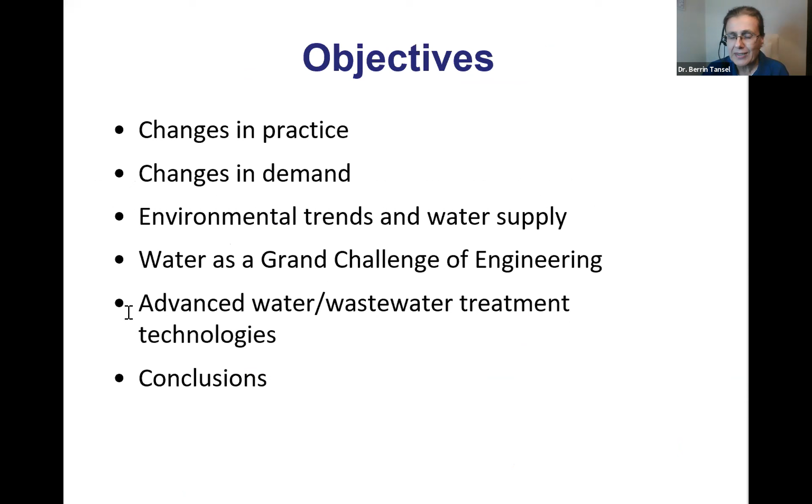First, driving forces for engineering practice include breakthroughs in technology, demographics, challenges, economic and societal forces. Currently, we are in the middle of a challenge, of course, the pandemic. So that is going to result in some new technology developments, as we are seeing in the vaccine, as well as some other effects in the technology.

Over time, historically, there have been 4 industrial revolutions that have changed how we live our lives and how we use technology. The first industrial revolution is mechanical, which created steam power and how it is used in different applications. The second industrial revolution is electrical for mass production. The third one is more recent, in 1969, the internet, which has changed our lives. And the last one, which started around 2000 or so, is the use of cyberspace, the digital revolution.

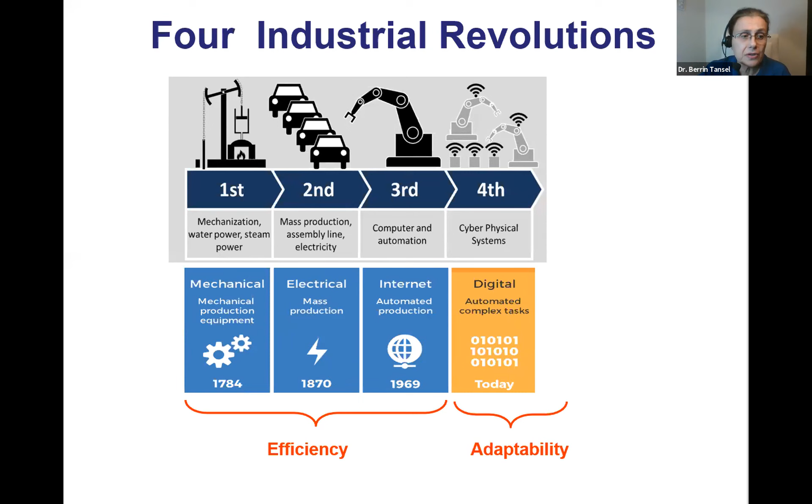So as the world population and technology are changing, the first 3 revolutions have changed corporations from an economic perspective. The last revolution, the digital revolution, has empowered people. So as a result, there have been some changes in how we live our lives.

I'm going to look at the last revolution, the internet, and how it has changed things from an environmental perspective. As the internet came into our lives, from an environmental perspective only, we see urbanization, which has an effect. And later, in the second decade of the 2000s, with urbanization, we see water shortage. We did not really talk much about water shortage before, but now we're talking about water shortage as an exponentially increasing challenge.

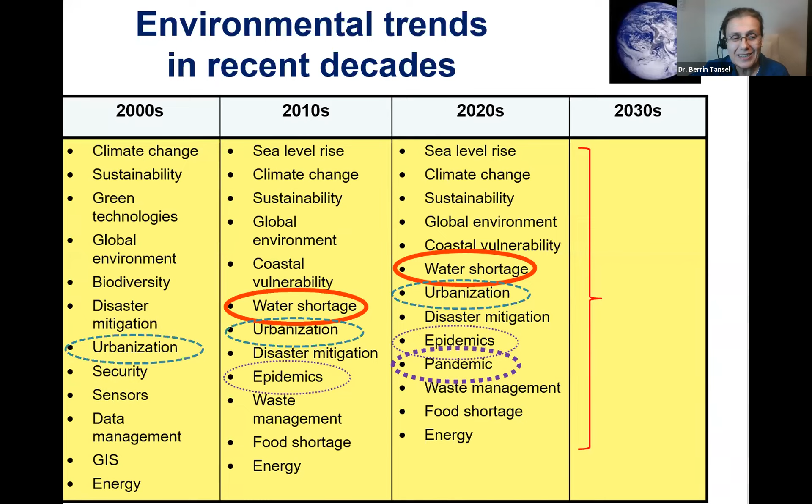In the 2020s, we have seen multiple challenges: pandemic, of course, and some epidemics like bird flu and swine flu. Urbanization has been increasing exponentially, and these challenges are going to be present as time goes on.

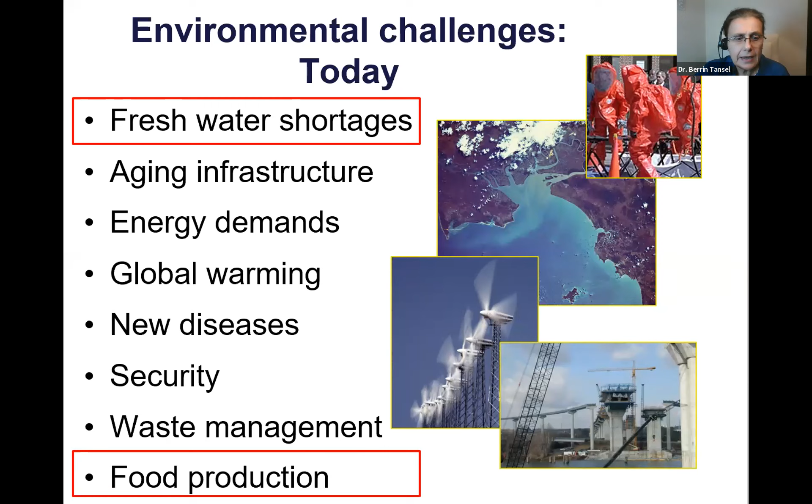If we focus on environmental challenges, water appears in two areas. We are seeing freshwater shortage worldwide—it's not just a regional problem. We are also seeing, as an environmental challenge, food production from an agricultural perspective, which requires water. So water is an interesting commodity, and it is becoming very valuable as time goes on.

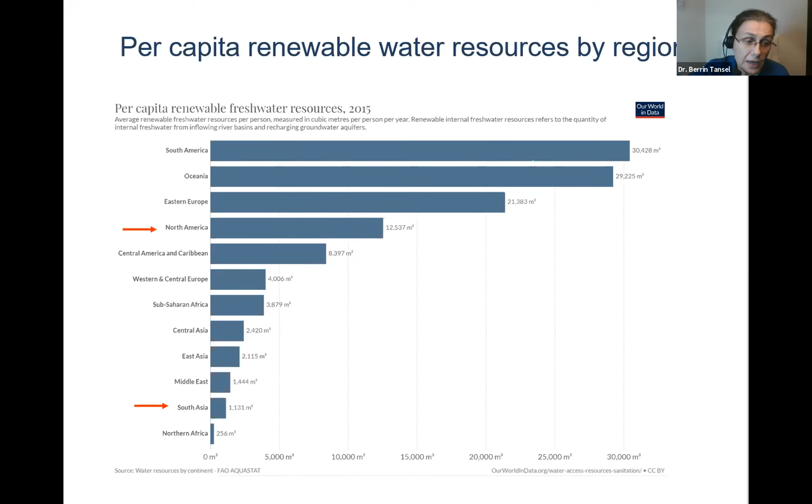The next one shows renewable freshwater resources per capita. Brazil is declining, due to increase in population as well—the water as a commodity is not decreasing, but population is increasing, so per capita availability of water is declining. If you look at the US, it's near the top, and India is also at the lower end. It seems like over the years, renewable freshwater resources per capita is slightly declining.

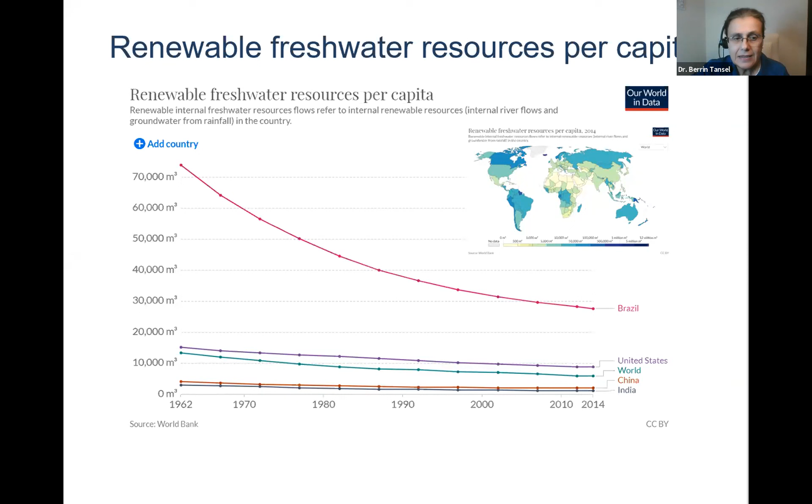This is mainly due to a significant, exponential increase in population. We call this increase super exponential, because exponential is usually first order, with a half-life. If you look at these increments every 10 years, population is not increasing steadily—it is increasing a lot more. It doesn't have a fixed half-life or doubling rate.

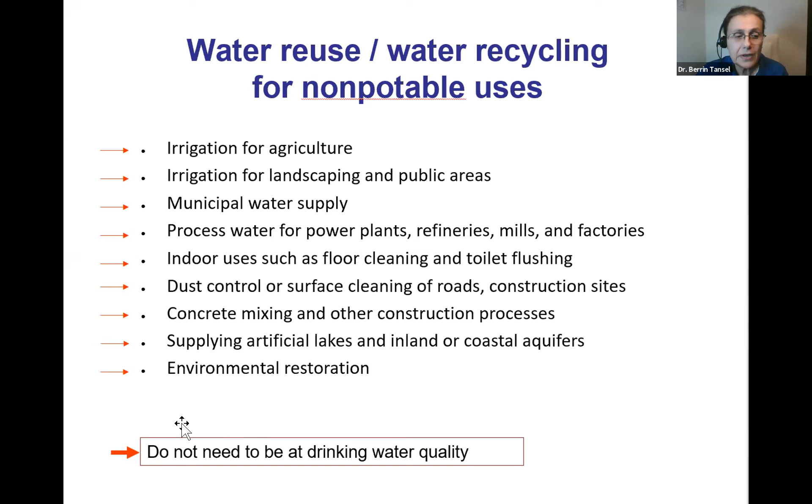Next, I will address some of the advanced treatment technologies which are becoming popular. There is some confusion in the term advanced treatment. For wastewater, advanced treatment refers to technologies after secondary treatment. In water treatment, when we say advanced treatment, it means unconventional or new—something slightly different from what used to be conventional.

So regardless of the definition, advanced water treatment requires that the water, before advanced treatment, be treated to some point. For wastewater, we have primary treatment, secondary treatment, and anything after secondary—after biological treatment. This could be another biological treatment, physical separation, or some chemical separation. Anything after this is considered advanced treatment.

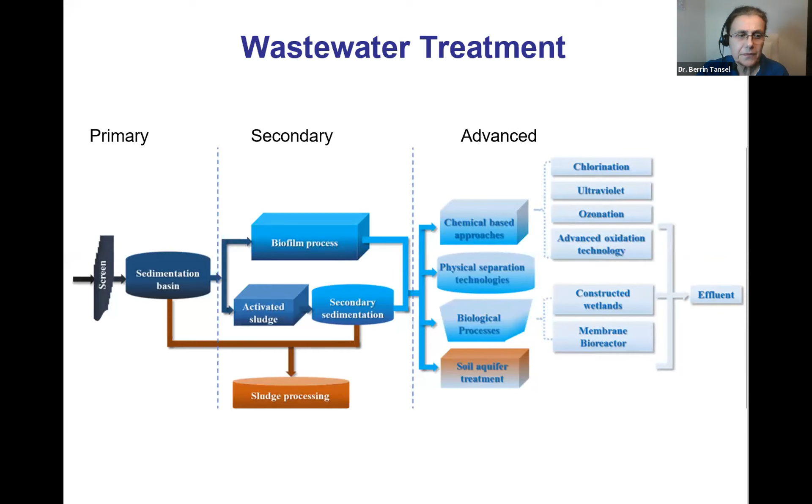For the advanced wastewater technologies, in some literature people still say emerging, but these technologies have already emerged. They are already in use, but the terminology 'emerging' is still being used as the technology is transferred to other parts of the world. I will cover briefly membrane technologies and advanced oxidation processes because they have certain advantages.

Membrane technologies involve physical separation, filtering water using different types of permeability membranes. As you decrease the pore size, reverse osmosis produces drinking water quality. Microfiltration does not produce drinking water quality and doesn't remove most contaminants. To remove divalents like calcium and magnesium, we need to go all the way to nanofiltration.

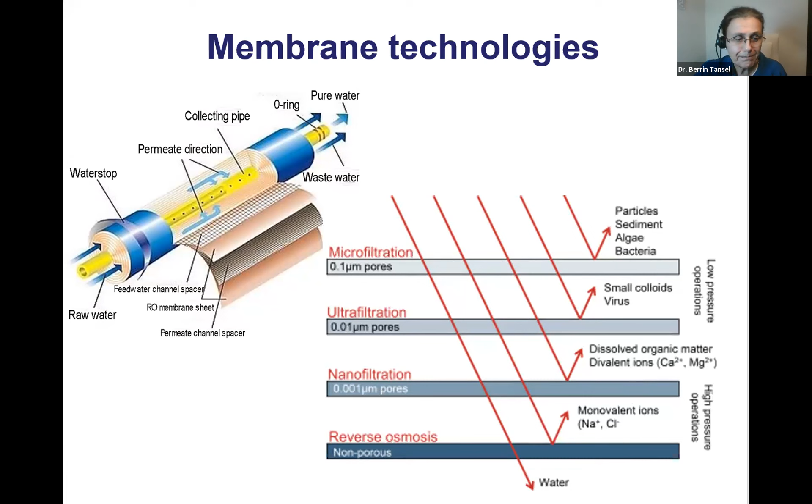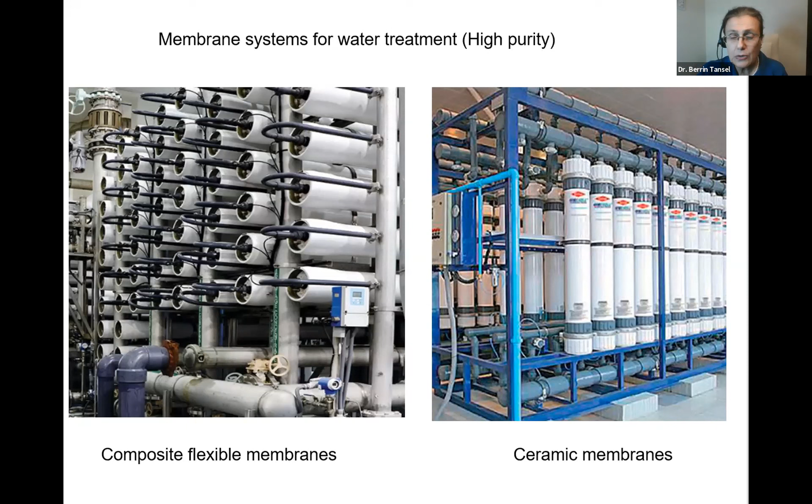Membrane technologies have certain advantages. Currently on the market we have two types of membranes: composite flexible membranes and ceramic membranes. Depending on what type of membrane is used, they can be oriented either horizontally or vertically. These are very modular systems, with a very small footprint, easy to use, and easy to operate securely.

This is drinking water treatment, and nanofiltration is usually used before the RO process, reverse osmosis. It contains high levels of ions and salts and is not typically suitable for agricultural use. If it is used for agriculture purposes, the concentrate, which contains all the material removed from water, usually requires some kind of blending with fresh water.

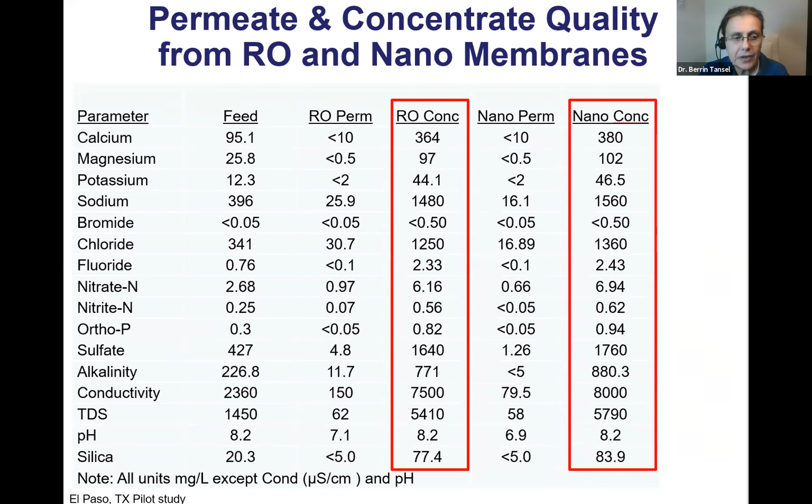I also want to address advanced treatment for wastewater treatment. This is on the wastewater side, a modular membrane bioreactor system, which replaces activated sludge. These can also be used for remote applications, such as toilet flushing and other purposes. The advantage of this process is that it's a standalone system. A typical wastewater process requires secondary treatment, and the membrane bioreactor replaces these two units with a much smaller footprint.

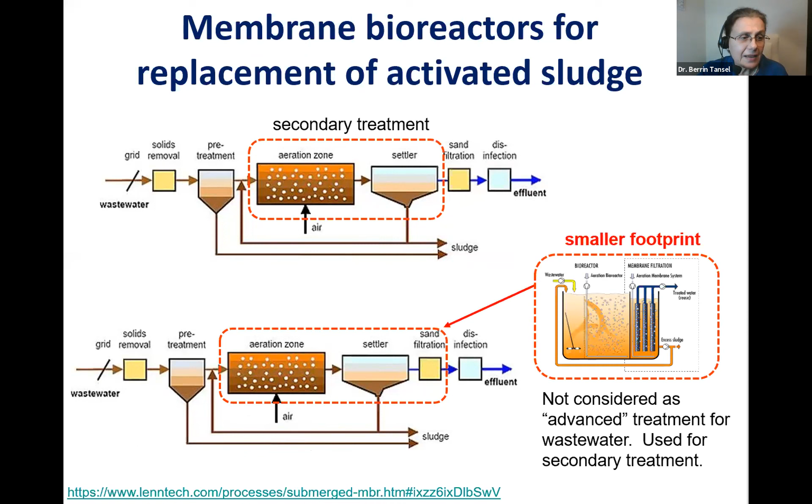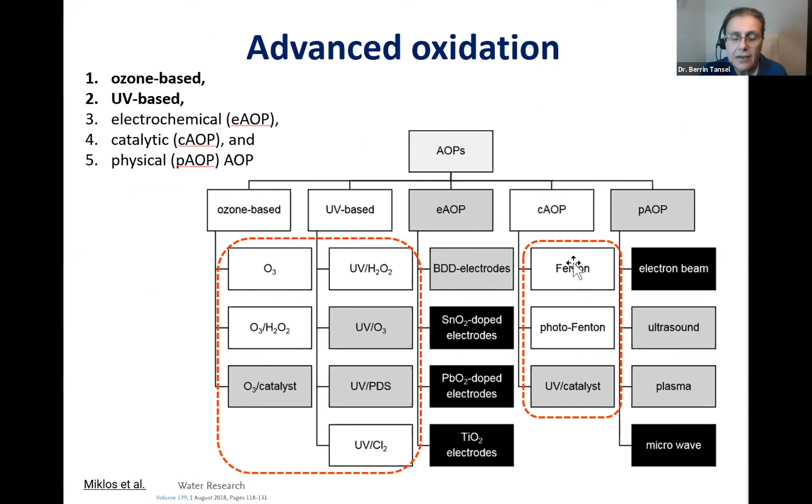Next, I'm going to briefly address advanced oxidation processes. These involve a chemical process and are classified by the type of chemical and catalyst used. We have five types of advanced oxidation processes: ozone-based, UV-based, electrochemical, catalytic, and physical. Among these, ozone and UV-based are more commonly used, and we are seeing some newer advanced oxidation processes like Fenton and UV oxidation.

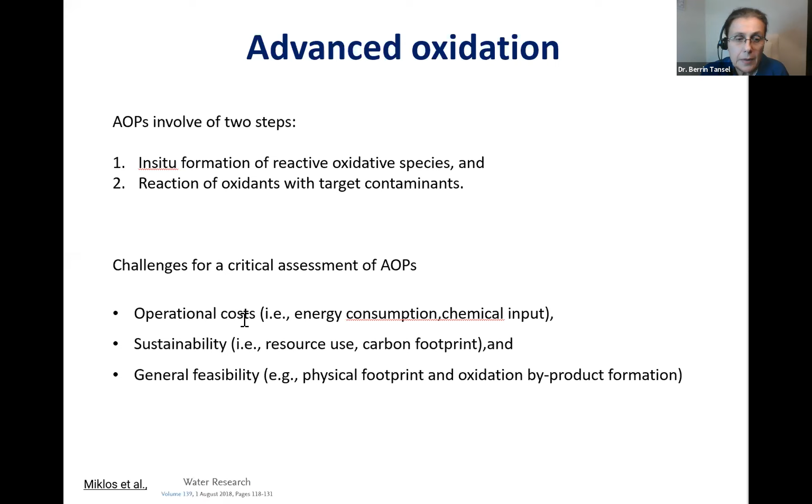Advanced oxidation has certain advantages. It is a fairly fast process because it's a chemical process. It breaks down organic compounds. However, there are some challenges associated with advanced oxidation for operating cost, sustainability issues, and general feasibility.

Advanced oxidation requires an oxidant—it could be ozone, peroxide, persulfate, or chlorine—a catalyst, and an organic compound. It requires these three, and it only targets organic compounds. They are compared in terms of electrical energy per order, which is defined as the electrical energy needed to degrade the contaminant, usually a carbon-containing contaminant, by order of magnitude in one cubic meter of water.

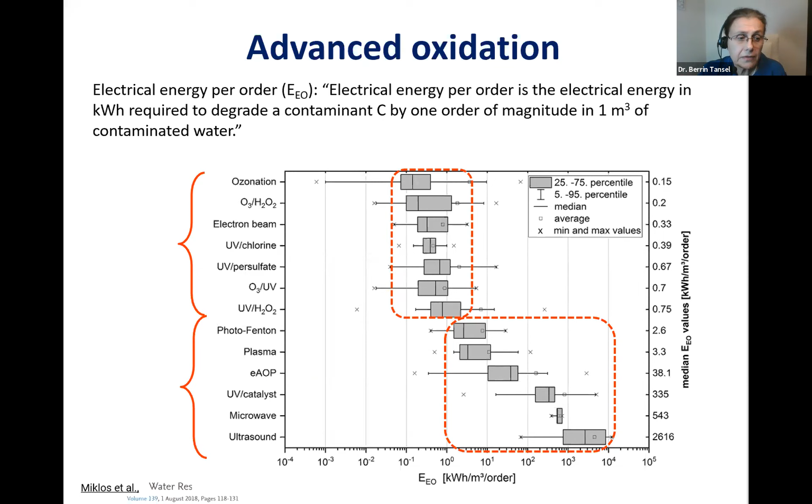Of course, the top ones here, ozone and UV, are relatively cheaper. An example of an ozone advanced oxidation process is ozone itself, which is the most commonly used, and it can be enhanced by using peroxide, UV, and some catalysts. The process can be faster and more rapid.

One challenge, especially in the case of chlorine and some of the oxidants, is byproduct formation, which may not be completely oxidized. In the case of chlorine oxidation, for example, we have carcinogenic compounds such as total organic halides, trihalomethanes, and haloacetic acids, and some inorganic byproducts as a result of the oxidation reaction.

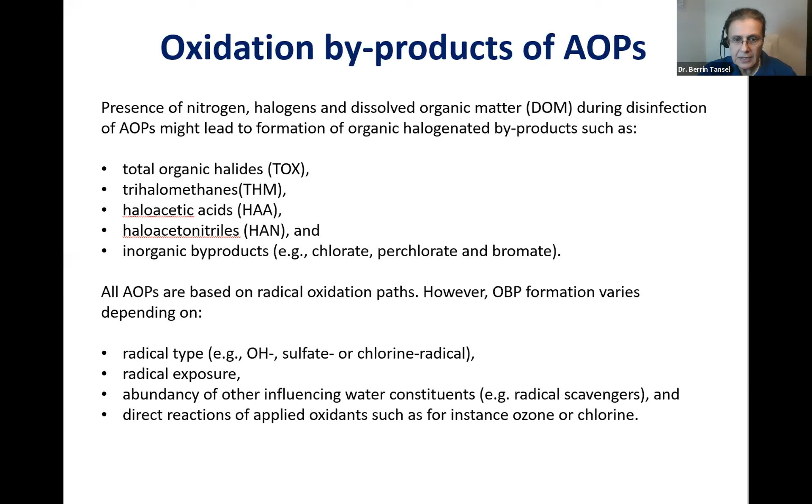With each advanced oxidation process, the process is started by the oxidant, which creates a radical compound that starts oxidizing different compounds as time goes on. One main advantage of advanced oxidation process is that it is able to decompose some of the highly resistant compounds to biodegradation. So by chemical processes, we can degrade some pharmaceutical compounds and some organic micro pollutants.

I'm sorry, I'm going really fast for the time, but in conclusion I want to highlight a few things. Water demand is increasing at a global scale because population is increasing, and per capita availability of water is declining rapidly. Fresh water is in short supply, especially for agricultural and industrial use, which has a high increasing demand. We will need to come up with other alternatives for water reuse and recycling. We need to increase water reuse.

Especially for non-potable reuse applications, we can have some water blending or water reuse that could be suitable for specific applications. We also need advancements in water treatment technologies, and we need to transfer some of the reuse technologies at the global scale to increase water reuse.

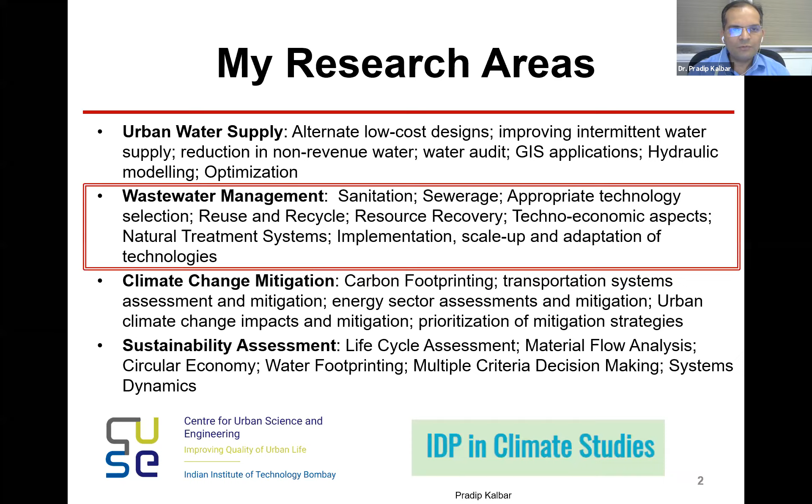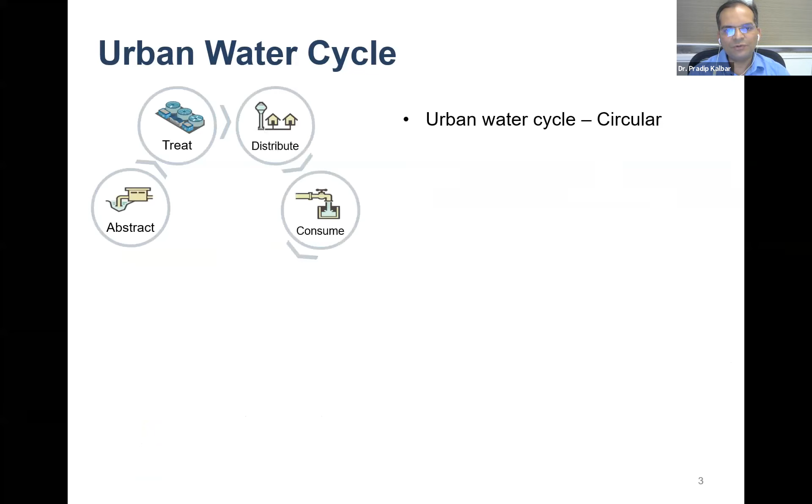So today I'm going to focus more on a wastewater story, which is the theme of this particular webinar. Specifically urban water cycle in India - if you see, we have to reach a circular urban water cycle. But currently we abstract water, we treat, we distribute, we consume, we generate wastewater and try to treat and then dispose. There is no circularity - we are mostly in linear use of it.

So this is our water cycle, but a lot of urbanization impacts are happening, like population, as Professor Tansel has highlighted - the population and other industrial uses are increasing, and lifestyles are changing.

So many issues are there, and changing from linear to circular is a big challenge. We will see what are the challenges and opportunities into it. We want to achieve this particular 6 R's. The entire presentation will be attached to reduce, reclaim, recycle, restore, recover - these principles of recycling. There can be more R's also; people have listed many types of R.

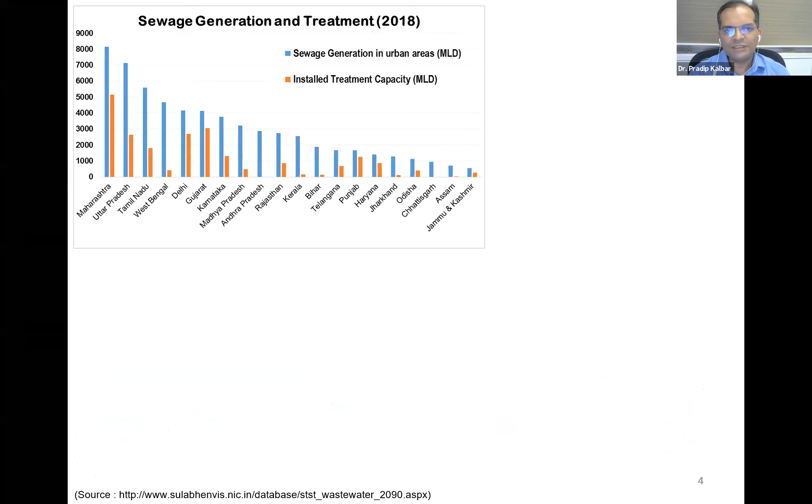Particularly in India, the sewage treatment and generation scenario - every state is facing the gap. There is a gap between how much sewage is generated and installed capacity. Every city is behind installing more treatment capacity. Overall in India, about 37% sewage treatment capacity is there, and the rest is the gap.

But we have to understand the important resource - generated wastewater itself is a more important resource. That particular change of mindset is needed.

Recently this data was released again from Central Pollution Control Board. Although we are saying we are in a gap of the treatment system, the capacity that is utilized is not fully utilized. In many locations I have found that a treatment plant is there, but the collection system is not complete or not there at all.

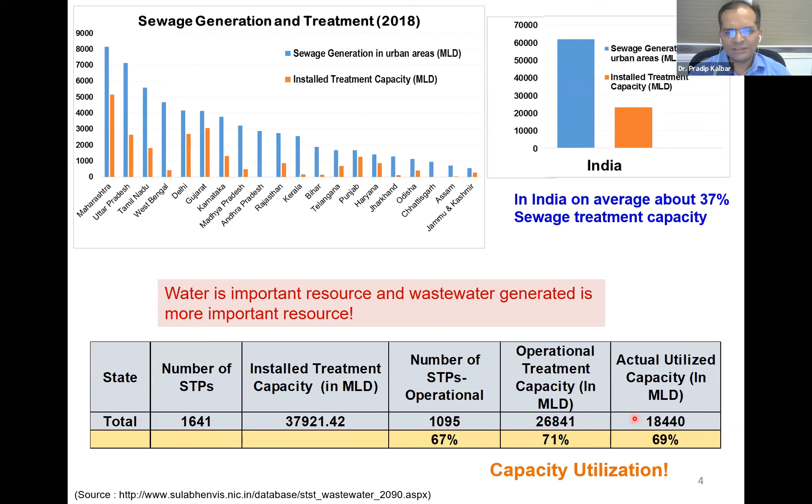So we are in this situation where a treatment plant of peak capacity for the next 30 years is installed. But as a consultant or engineer, we understand there can be modular construction, there can be phase-wise construction, but urban local bodies want to go for a single tender for a 30-year contract. So there are many issues, and huge infrastructure investment is going to waste. Capacity utilization has to be focused, even with simple analysis. A couple of students are going to work on further detailing this capacity utilization, but I see a big gap there.

Coming to the quality standards - historically we have used this general discharge standard where our typical BOD in our mindset is 30, and there has been a lot of pressure to change and modify to more stringent norms. So recently there was a change.

I'll come to that. These are the desired water quality standards for recycling, for toilet flushing, landscape irrigation, and fire protection. In Mumbai, the standards are there - the high-rise building committee has recommended standards more stringent than Western countries. The issue is enforcement - who will do this? That is the more important question to be asked.

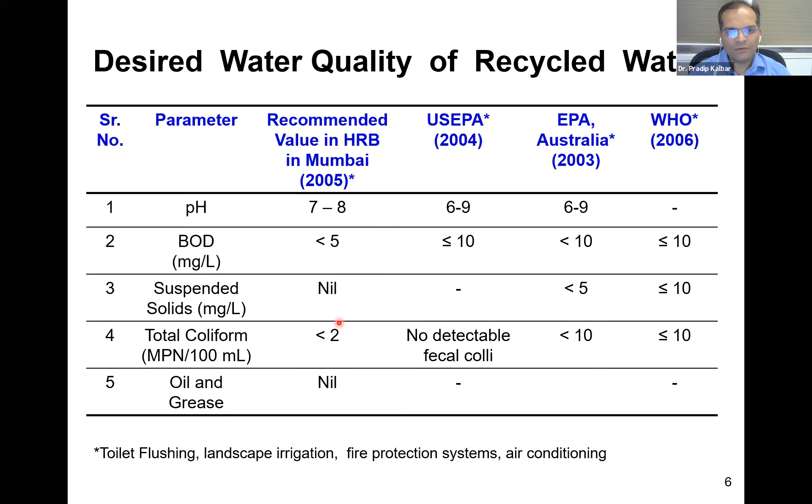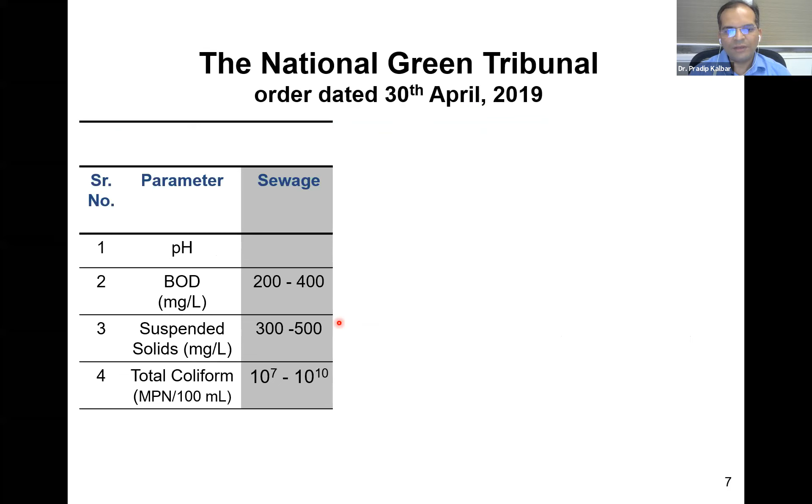So it's not a question of whether we have a standard or need more debate on this - we have the standard, and there's also recently a clear order from the National Green Tribunal. For mega and metropolitan cities, it's a 10 milligram per liter BOD standard, class 1, with some flexibility elsewhere. But NGT has clearly said that all water resources are equal, and we have to aim for this particular discharge standard.

Now this poses a big burden on the infrastructure, because how will cities generate the money and cope with this new discharge standard, since they are already struggling to match the 30 milligram per liter sewage treatment infrastructure. Suddenly 10 milligram per liter is a big challenge, but it can be converted to opportunity, and that's what I'm going to discuss.

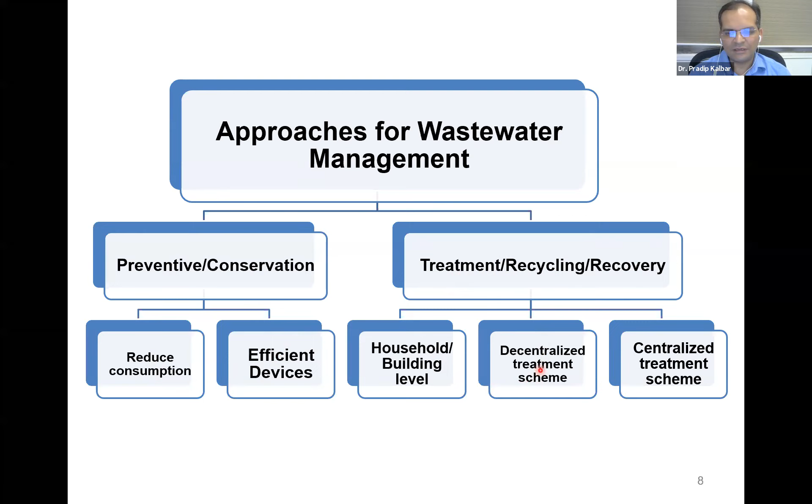These are the broad approaches of wastewater management, and Professor Tansel has already given you the overview. But on the management side, we have to work on prevention and conservation also - that keeps getting neglected, and we directly jump to the treatment side. But this is a big box, big opportunities there. We have to move from treatment to recycling to recovery. It's a big change in infrastructure mindset that has to be brought in - it's not only treatment, but we have to lead to recovery. Then there is building-level treatment, decentralized, and centralized - this spectrum also we have to keep in mind.

Why are we not able to achieve this? That is the bigger question. So what is wrong with the current approach?

So the issue is that on one side, we are fixing nitrogen at a huge amount of energy in the fertilizer industry, and we are again putting energy back to release this nitrogen back into the atmosphere. So you can see, on one side, you have a huge investment of energy for fixation and then release. So this needs to be fixed.

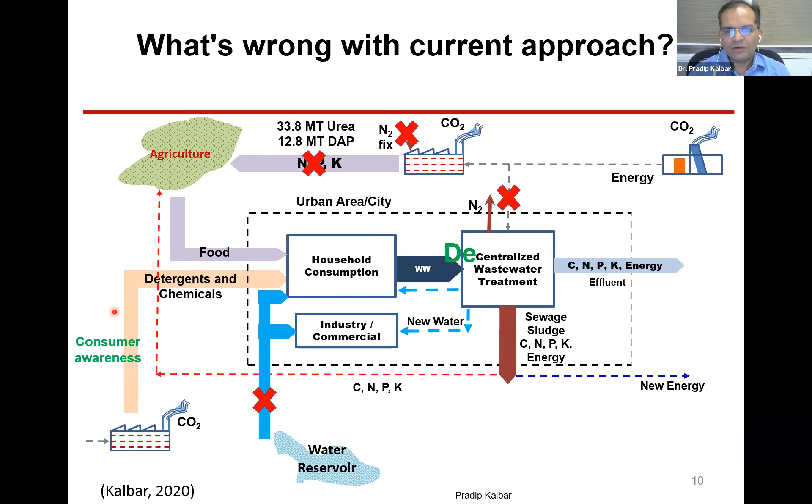So the issues here, we will discuss decentralized and centralized later, but consumer awareness is another big challenge. Basically, a centralized system, as we all know, is a tail-end system where everything is taken out of the city boundary or towards the end of the city and then treated. In decentralized, we try to do some scalable, small scale systems where decentralized treatment can be used.

Now, the issue is this decentralization is a matter of scale. Too many small systems are difficult to operate and govern and do not offer scale of economy. So we should not jump on decentralization just blindly. We also need to look at what is the scale of economy, how small systems are feasible.

Highly centralized systems place a challenge in recycling of treated effluent and sludge, because if you put everything at one place and try to recycle, again secondary distribution network cost will come, sludge transportation cost will come, and there is no scale of economy beyond one point. So all engineers will understand this, that the scale of economy is somewhere in between.

And this additionally requires deeper sewage networks for flat terrains, which are difficult to maintain. I've seen in many cities the situation of sewage networks. Enthusiastically people go for a sewage network underground, and then maintenance is with the urban local body. It is very difficult for them to manage.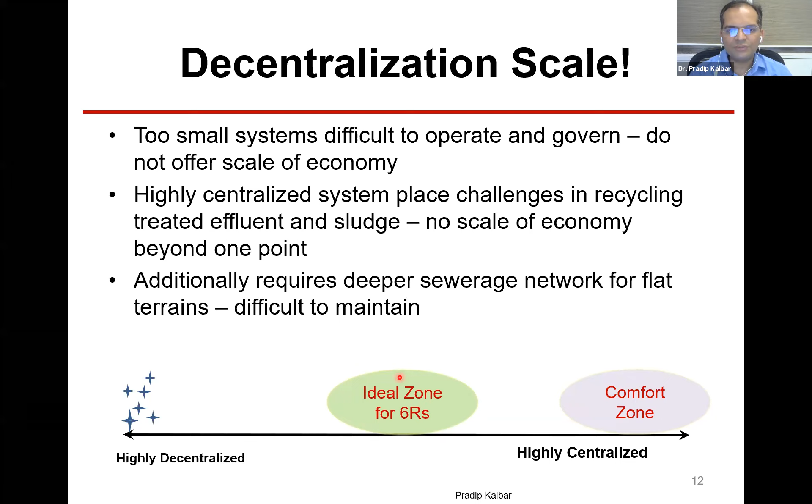The ideal zone for implementation is in between, and for every city this scale will be different. So we have to identify for that given city how we can segregate the centralized system and have a decentralized system, so that the 6R's - recycle, reuse, reduce - all those will be implemented. If we have that kind of flexible infrastructure, it will create much more opportunities than a centralized infrastructure. That's the whole point I'm trying to make.

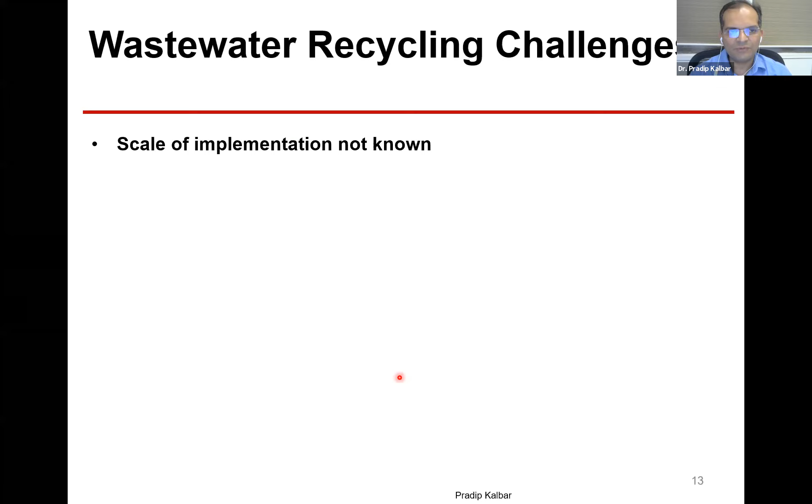So the challenges in wastewater recycling is scale of implementation is not known. People just go for a centralized system because there is no knowledge. So we are working on that to create that knowledge. Energy requirement - can we make it energy neutral? Because there is no revenue with the urban local body to operate these plants. So much of a dark situation - people put off the aerators because they cannot pay energy charges. So this entire infrastructure will go waste. There are resources to be extracted - nitrogen, phosphorus - a lot of technology scale up is needed.

Pathogens and pathogen removal - if you want to recycle water for higher ends, there's a question of reliability, because we have to develop a system which is reliable, given the risks posed by treated wastewater. So whenever somebody asks me why I say costs are higher, it's because I'm imagining a very reliable system. If you say you'll provide recycled water to industry, you have to provide it - you cannot say tomorrow the plant is not running or a parameter is not working. So that reliability cost also needs to be incorporated in the system. That's why the cost of recycling water has to be properly counted.

Emerging contaminants - we are already not able to match the carbon, BOD, nitrogen, phosphorus limits, and there's already so much use of household chemicals. That's why I said consumer awareness matters - so many chemicals are used unnecessarily in households and get discharged, posing another challenge to recycling of water. Revenue models - who will fund this capital infrastructure and operation and maintenance? That is a big question. Operation and maintenance capacity with the urban local body, skilled manpower, governance, and conservation - these all need to be thought of together to really imagine this particular system.

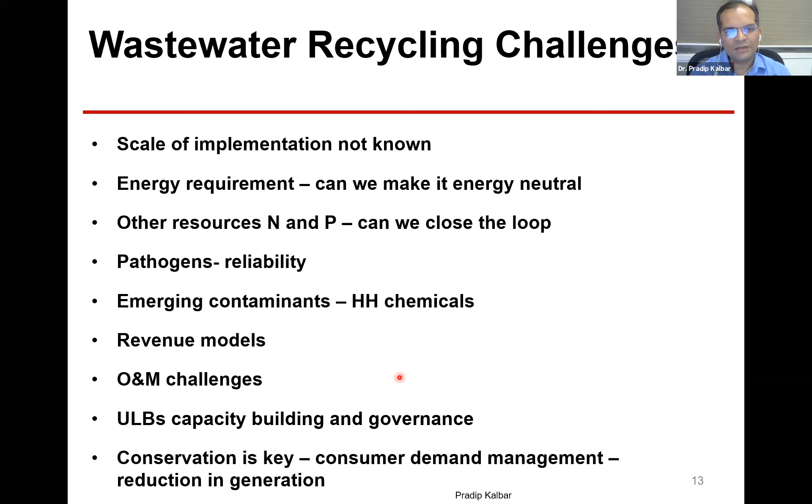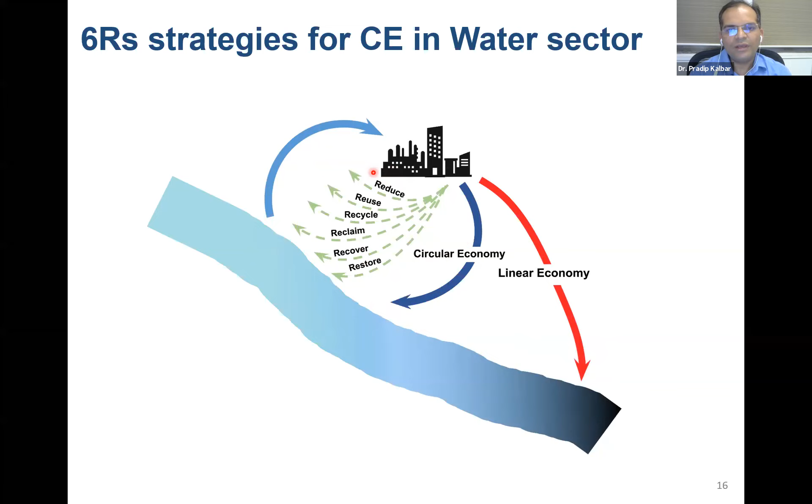So basically what we are saying is we have this particular urban water cycle where a water treatment plant and urban wastewater treatment plant are there. Currently we are doing it in a linear way - disposing of the water and the nutrients. We have to go for implementing these 6R's, to change this picture from one city passing on the problem to another city. How we can fix this is the entire effort that we need to pose.

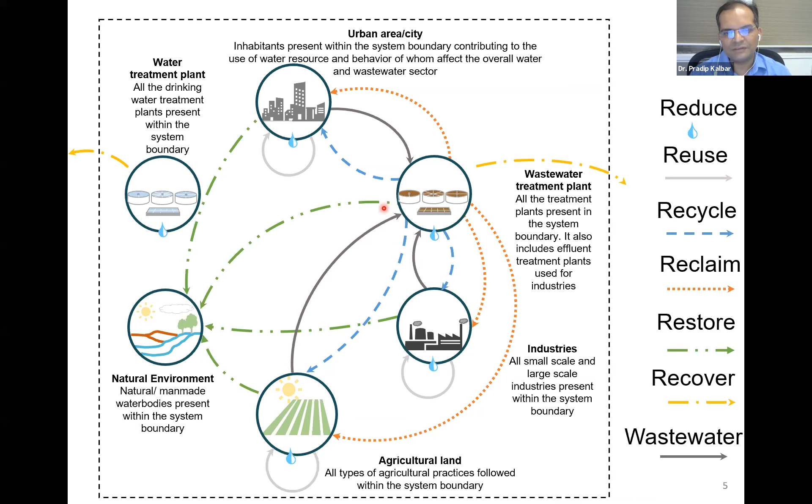So first we have defined what is recycle, reuse, and those definitions need to be clear. Reduce - at every phase we have to reduce water wastage and consumption. Reuse - cascading of resources, how much water we can use without treatment. Recycle - city using its own water for secondary purposes after treatment. Reclaim - city selling water to industry, or industry buying water from city or other stakeholders. Restore - when there are no enough buyers. In many projects I have seen good treated water available, but there are no enough buyers - there is a policy gap. So you can again recharge the groundwater and recover. Energy recovery and nutrient recovery is the next phase of technologies that we need to adapt.

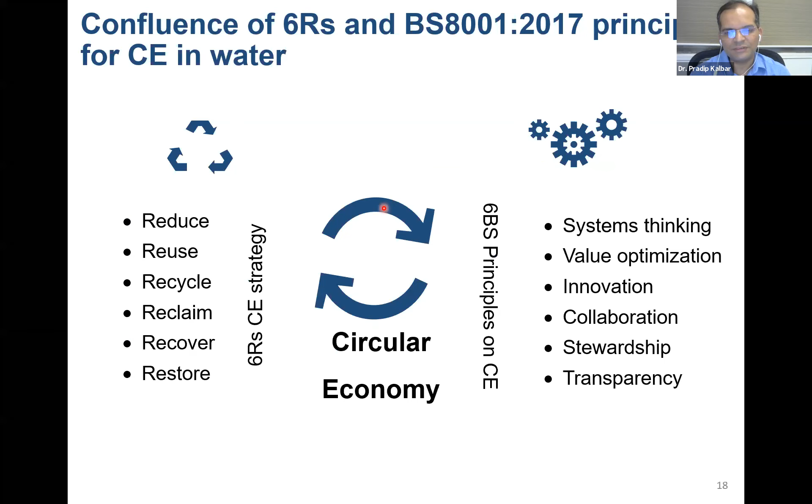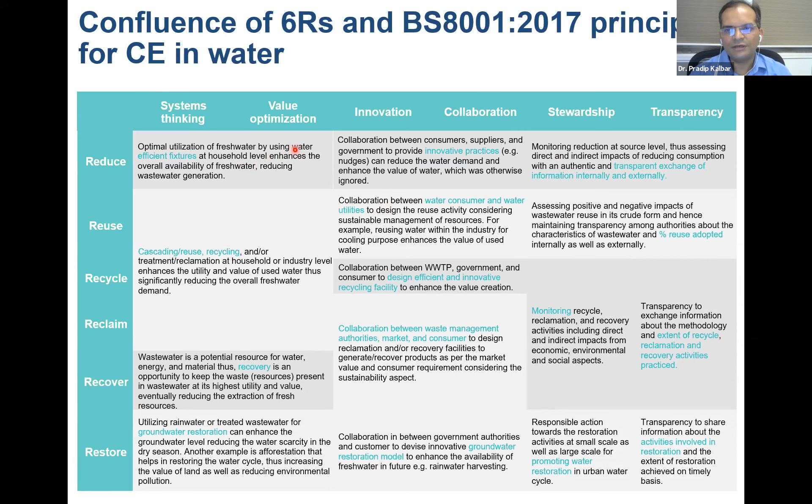So basically, circular economy provides this particularly nice framework for bureaucrats and managers, because here you apply system thinking, value optimization, innovation, collaboration, stewardship, and transparency. We have identified how urban local bodies can work with industry and mapped each of the R's with these particular principles of circular economy. You can go through this detail - it's very thoughtful. My PhD students and I have worked on and given this particular tabular formulation of how we can apply system thinking, value optimization, innovation, collaboration, stewardship, and transparency. So that is the framework we have proposed.

So the entire point I'm trying to make is that cities first need to create a market for recycled water, because if there is no market, there is no point in putting so much infrastructure. Otherwise there will only be regulation. But by meeting regulation, if you can also sell the water, the sustenance of the system will be improved.

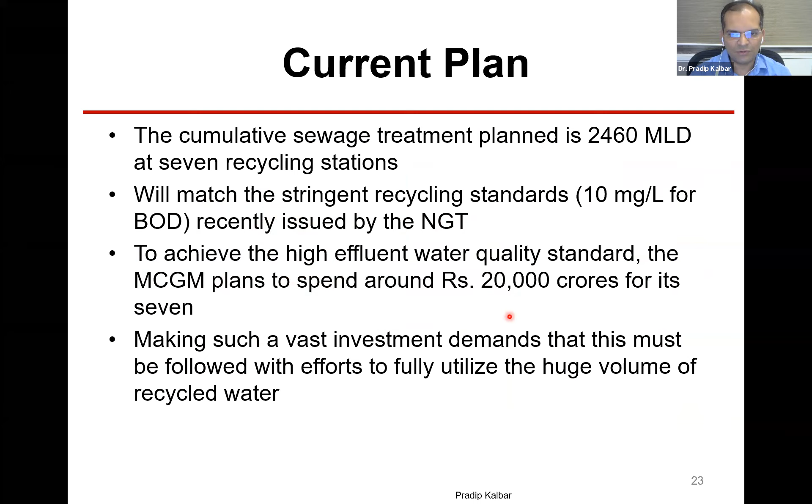If you make such an investment, it also demands efforts to utilize the huge volume of recycled water. So 20,000 crores going in just for treatment is not complete utilization. Why is recycling not possible in the current context? Because it is not known who will consume the treated sewage unless there is a market for it.

The cost of recycled water is around 10 to 12—this is not accounting the distribution cost, just the treatment cost. Whereas the freshwater tariff is about 3 to 6 per meter cube.

So there is significant variation at the regional level. Although the MCGM has a telescopic billing policy, the connections are not metered, not mapped, and most of the meters are dysfunctional. So the implementation of the telescopic billing policy remains on paper only.

The production cost of water in Mumbai is about ₹15. So it's the issue of price—at what price are we producing the fresh water?

The revenue demand and collection from the MCGM has been the same for the entire last decade. Basically there is no change in raising the bills—that is the current scenario. This shows the gap between production cost and revenue remains unbreached.

In the DPRs, the MCGM plan is to have 25 to 50% recycling at each recycling station. Even if we realistically plan for just 10%, that is about 400 MLD. The big question is who will be ready to use it, and who will distribute it.

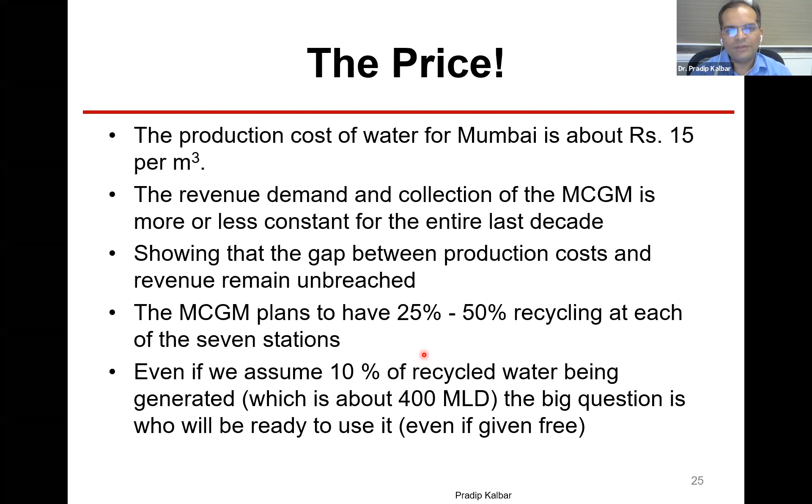It's a big question. The next issue is location. The planned recycling stations are highly centralized at the far end of the system, in the near coastal areas. This will need a large secondary distribution network in mostly concretized roads already crammed with dozens of other utilities.

Instead, decentralized recycling stations of about 50 MLD—this 50 MLD is my number, you can debate it—but for a city like Mumbai, this can be called decentralized, and may be more feasible, as this creates an opportunity for establishing a localized recycling network. This number has to be decided for each city.

For a 100 MLD kind of sewage flow in a city like Kolhapur, the decentralized scale will be different. So buildings can then have a second water connection from such localized recycling water, with modification in storage and internal distribution.

So there are a lot of changes needed in the consumer's infrastructure, and in the guidelines and bylaws, because existing bylaws do not anticipate other water resources for non-potable use. That needs drastic change—it's not the technology, it's not the physical infrastructure.

Bylaws need to change to enable a mandatory dual plumbing system for future buildings. I know it's difficult for existing buildings, but if we do not act now, it will be too late. Otherwise, in 10 years, I'll be making the same presentation about the need for a dual plumbing system—there's no point.

So resizing of all the municipal connections is needed, because current connection sizes are huge in Mumbai, at least as we know. Residential, commercial, and industrial establishments need to restrict potable water supply for domestic purpose only, because they are getting the benefit of fresh water.

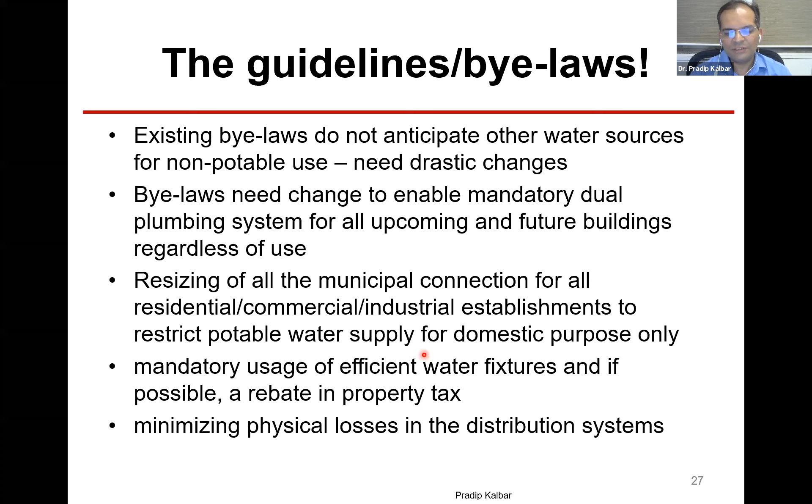If you change the connection sizes, or cut off connections, some stringent action has to be taken. Mandatory use of efficient water fixtures, and if possible an associated rebate, and minimum physical losses in the distribution system—that's another story, how we can improve water supply.

Creation of a recycling market will happen when urban local bodies work and talk to institutions, commercial establishments, industries, railways, metro boards, and port trusts. Small soil treatment systems need to be created by working with these stakeholders, and we need some enablers. I'll be happy to collaborate with whoever wants to work on this idea.

And there is a need to provide comprehensive procedures and guidelines, and the responsibility of each stakeholder - who will sell, who will buy, at what cost, the level of treatment required, its use after treatment, and expenditure. All this needs to be defined before we jump to very fancy high-end recycling stations.

So in summary, there is no immediate need for toilet to tap. Many people go abroad and see everything connected, that's fine. In Western countries we have the reliability, the guidelines, everything is there. So enough other avenues are available in India for other secondary purposes. We have to first create a practice of recycling water. Recycling at the point of use or sale, that is the key - if you recycle water on the moon or Mars, who will distribute that water? So that is another challenge.

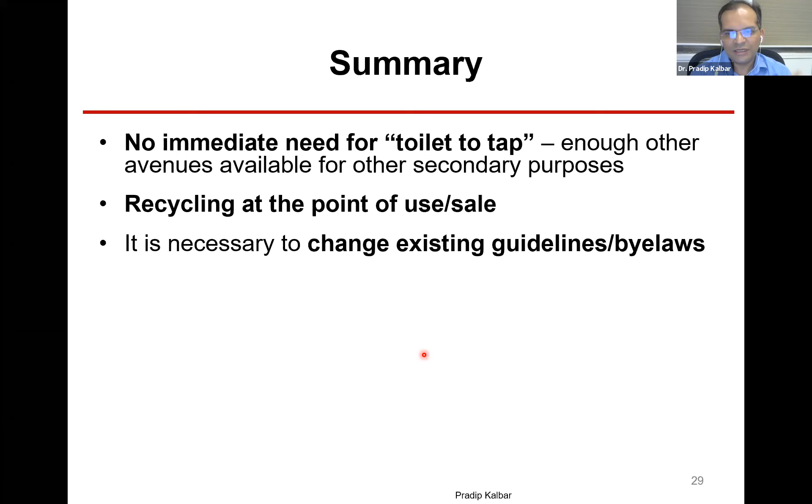So it is necessary to change existing guidelines and bylaws. Scale of implementation of the solution is more important than the solution itself. Many people spend time on technology discussions, but what is the scale you are implementing - that is more important. A recycling water market needs to be created hand in hand with recycling stations, because unless you have a market, there is no financial sustainability for these recycling stations. Decentralization and closing the water, carbon, nitrogen, phosphorus and energy loops is the key to achieve sustainable wastewater management.

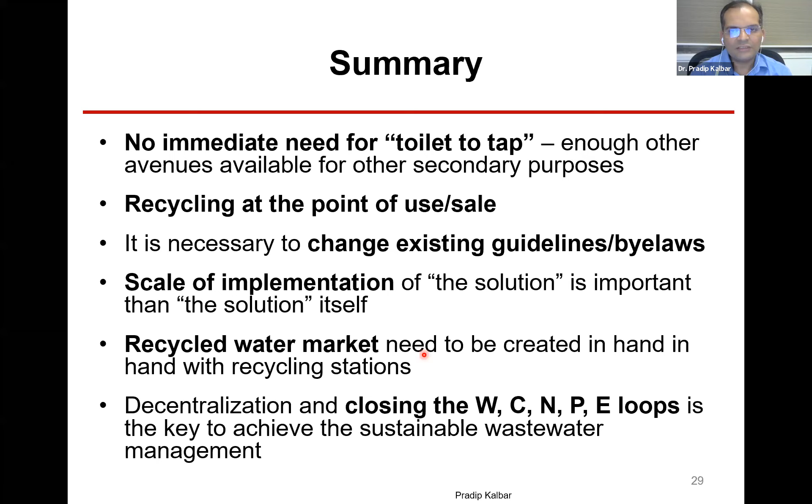So I think that's all what I wanted to share from my side as far as my understanding about this topic, and I'm really happy to be here with this particular group of esteemed members. Thank you.

Thank you, Dr. Pradip, for your very insightful presentation on the circular economy insofar as it relates to water reclamation and reuse. I have a question. If we are talking about circular economy, we need to close all the loops, be they local, national, or regional.

Now, I agree entirely that we need to create a market - we need to do the market survey for the recycled or reclaimed water. But the issue is, where do we start? It is an egg and chicken situation. Unless we go for projects for reclamation of water, there will be no thinking about creation of an infrastructure network for its use and distribution. So what I feel is that both of these should go hand in hand.

As you know, any project for reclamation from concept to commissioning may take about 3 to 5 years, which period I consider good enough to create and generate a market, and then also provide the necessary infrastructure starting from a small scale to the intended scale. You can always scale up and also find innovative solutions, some being use of this reclaimed water for construction purposes and creation of infrastructure itself.

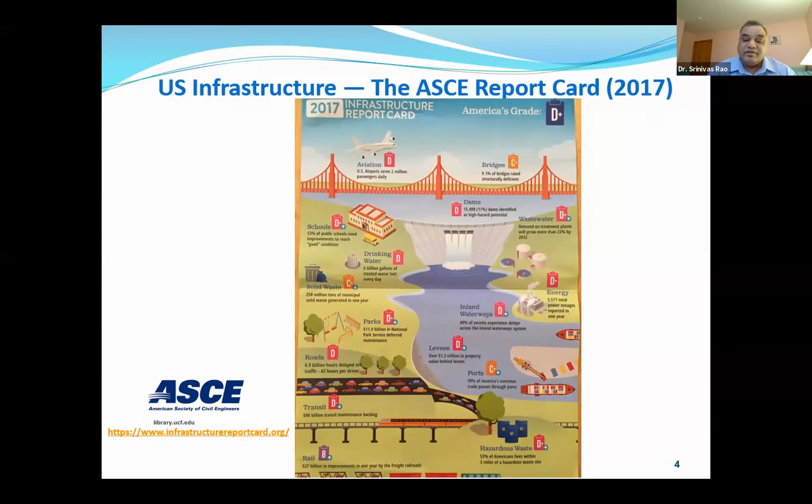Before we get into our drinking water and wastewater discussion, where do we fit in the big picture? For example, imagine the Great Lakes watershed or the Great Lakes Basin — we have environmental contaminants, either point sources or non-point sources. When we withdraw water from surface water sources or groundwater resources, we draw the water and then, to make it potable, we have applicable drinking water quality standards in every country, and we follow those to provide that quality potable water.

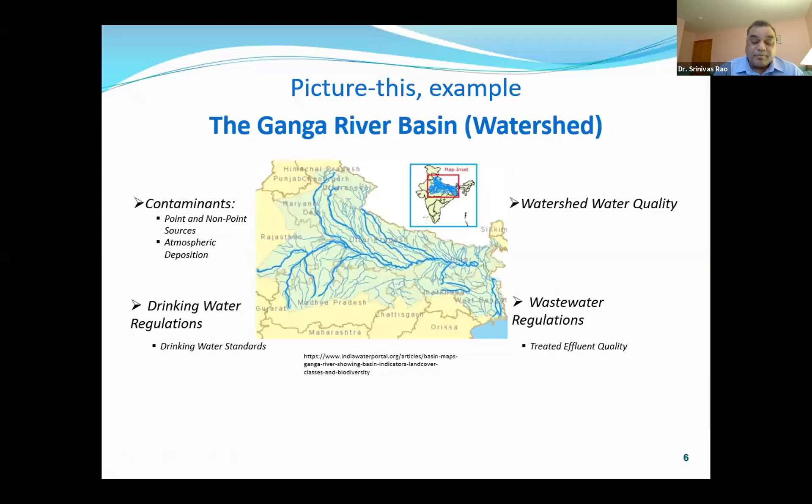On drinking water quality, the sources could be surface water, groundwater, or treated municipal wastewater effluents, TMWEs. For source water, we have to watch out for the types of contaminants: physical, chemical, biological, radiological. The professors touched on these acronyms: natural organic matter, NOM, total organic carbon, TOC, HABs, harmful algal blooms. And when we are disinfecting water for the final quality, then we are faced with disinfection byproducts.

In the US, we have more than 50,000 community water systems or public water systems. These terms are defined under the regulations, and we use treatment techniques and treatment trains to get to the ultimate drinking water quality across the US.

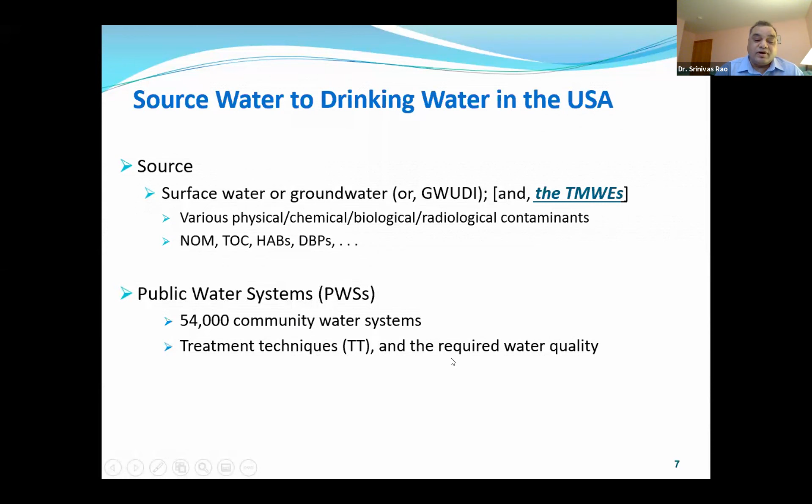The drinking water quality standards in the US include primary drinking water regulations. They touch on all categories of contaminants, and we call them MCLs, maximum contaminant levels. US EPA, US Environmental Protection Agency, enforces those standards, so the public water systems have to meet them day in, day out. There is no other way, and they must show that water quality.

There are also secondary drinking water quality regulations, and they are to control the aesthetic, cosmetic, technical effects. I have provided those links, you can look them up. US EPA does not enforce the secondary maximum contaminant levels, the SMCLs. Again, the Code of Federal Regulations is where you find all these regulatory requirements.

Bottled water is regulated by the Food and Drug Administration, under CFR title 21. Environmental protection is under title 40 CFR.

Under the drinking water regulations, we receive potable water day in, day out. The public water systems have a regulatory requirement to publish an annual report on the water quality supplied to all consumers, and those reports have to be made available to all consumers. You can find them on the internet and find out the details. It's a good read, and a lot of effort goes into preparing those annual reports. You can see the numbers for all the water quality parameters, how the water was processed, and the final water quality you have experienced.

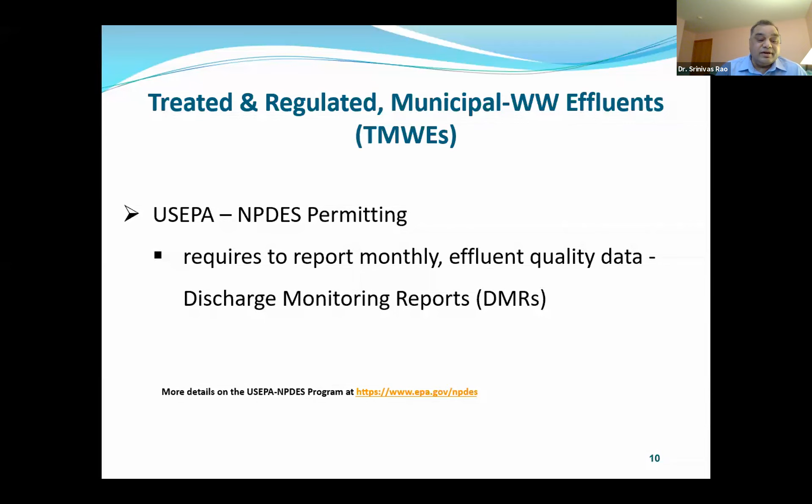Mostly the effluents are going to the watersheds, so reuse is important, as our expert professors noted, for the circular economy and water availability into the future. So that reuse becomes critical, and again, everything happens by the regulatory requirements up to the quality the facilities have to achieve.

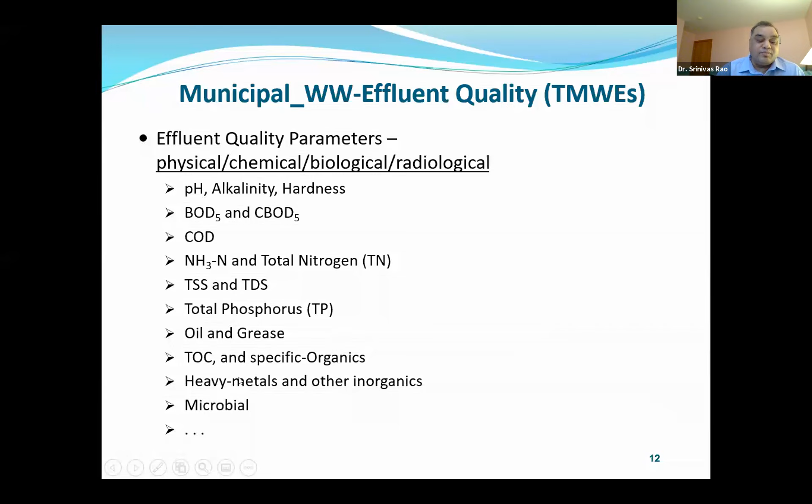So the discussion continues on effluent reuse. The effluent quality parameters again we check on: physical, chemical, biological, radiological. This is a list of a slew of these parameters, beginning from pH, temperature, BOD, COD, ammonia, nitrogen, total phosphorus, total dissolved solids, TDS, oil and grease. So we have various contaminant parameters to address when we say we are treating wastewater.

So I have found some information from this reference, Water Reuse, a good book to read, published in 2007.

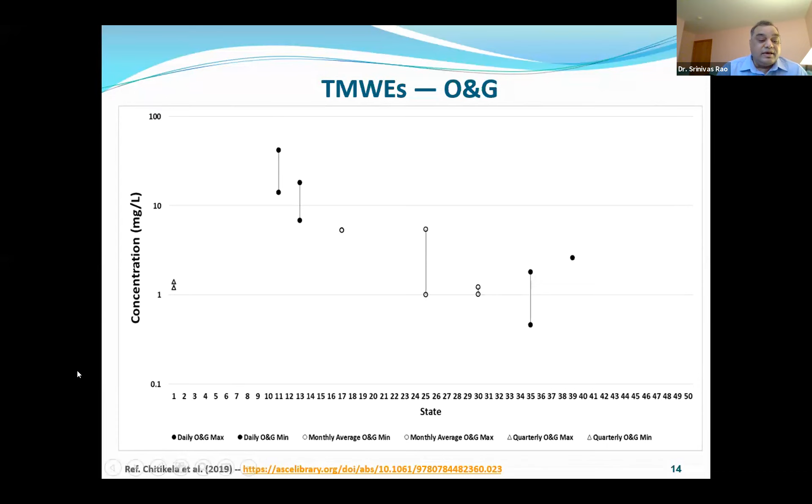And then Professor Tansel touched on membrane fouling. So it's important to have a good handle on all the effluent quality parameters.

So once the wastewater is generated and collected and received and processed at the water resource recovery facilities, mostly the clean effluents go to watersheds. That's where we want to draw and apply this advanced water treatment.

What's the thought process here? Where we are at, can we process it to add it to the raw water as a raw water resource, or can we take it and add it at some point within the treatment train, drinking water processing, or can we directly put it into the distribution system, or can it be supplied to a consumer? So these are the possibilities. That's how advanced water treatment becomes critical, and that has to be a permitted operation, so the regulatory requirements and so on will be there.

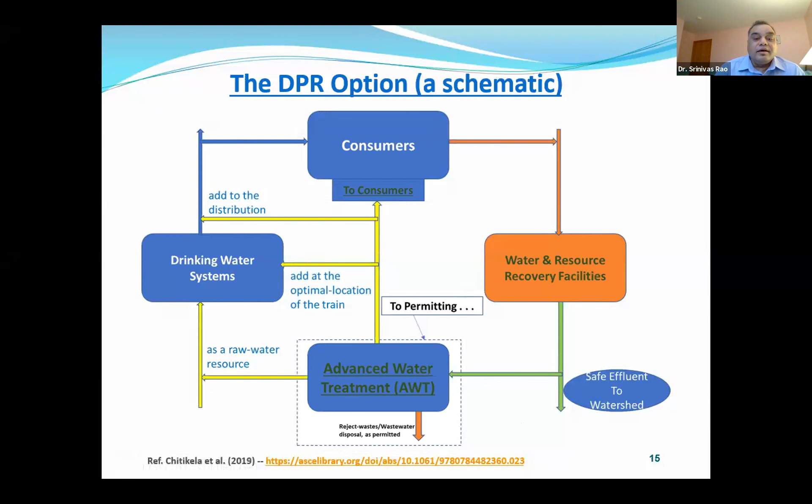So advanced water treatment systems are explained by the professors. The preliminary treatment will be required based on that effluent, the clean effluent quality, to remove the floating and suspended solids. Advanced treatment we can accomplish with RO, reverse osmosis, nanofiltration, and advanced adsorption systems. There are many advanced technologies available, and the treatment train will also include advanced oxidation processes, as explained by Professor Tansel.

So these are all regulated, and we have those drinking water quality regulations. We have to meet those standards. So now compare these numbers with those applicable drinking water quality standards for individual countries, the cities, or as recommended by World Health Organization, and again, the stringent requirements.

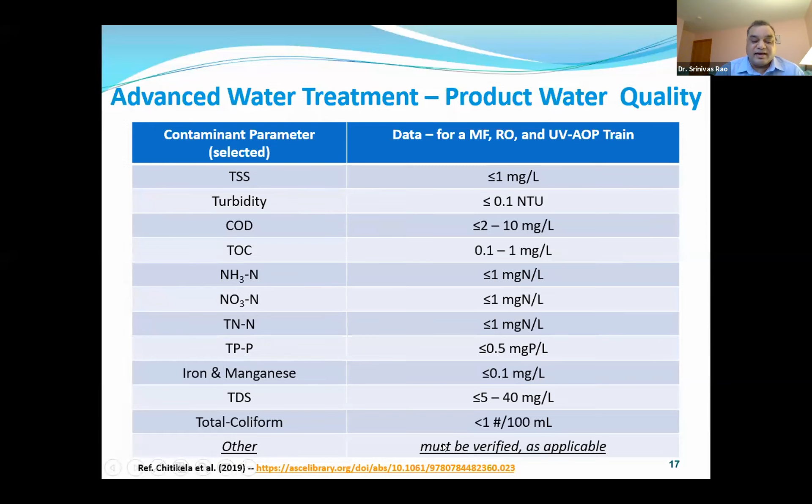The energy requirements, right? It's important. We noted that. So in the US, I presented some numbers here. These are not any benchmarks. Generally we observed this data, and then we utilize it when we work with the water systems in the US.

So treatment and distribution system, you see that 0.8 kilowatt hour per cubic meter. Wastewater treatment is 0.7 kilowatt hour per cubic meter.

And there is a spatial average. We've seen how much the US government is spending on energy from water intake to watershed return. So some number, this is a spatial average, 1.3 kilowatt hour per cubic meter.

So again, energy use is facility specific. You can try benchmarks. There is a big effort going on, but benchmarks have to be apples to apples, right? And if it's a green apple and a red apple, we have to notice the difference as well. So that's how stringent you have to be if you are going to establish benchmarks.

Now on advanced water treatment, various water treatment trains are high technology processes, and the energy requirement could be above 0.3 kilowatt hour per cubic meter, or 0.5 or higher. So that's the story on the energy need.

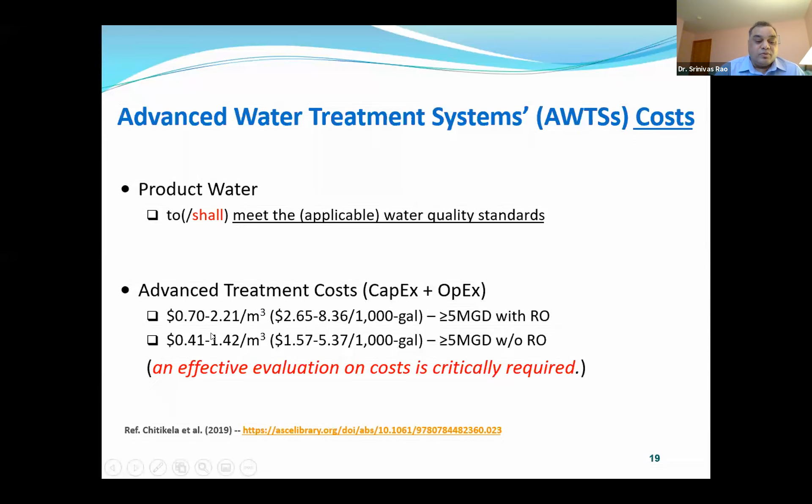Yeah, we have a lot of effort going on in the US and worldwide on how to make, at the least, the wastewater treatment systems energy neutral. There is that possibility, and then bringing in renewables, solar power, wind energy, and arranging that type of effective cash flow that is required to present to municipalities. So that effective evaluation on costs is critical.

So on the legislation and regulation side, EPA has this information. Pardon me? I said last 2 minutes.

Okay, thank you. So the state of California DPR definition matches with what I have shown in that DPR schematic.

And the California Water Code also includes that advanced water treatment should include all of the following: microfiltration, ultrafiltration, or other filtration processes, reverse osmosis, and advanced oxidation.

And the product water shall meet the federal and state drinking water standards. So a few other states, Texas, Arizona, have DPR regulations in the making, and there are real facilities operating in Texas and in California.

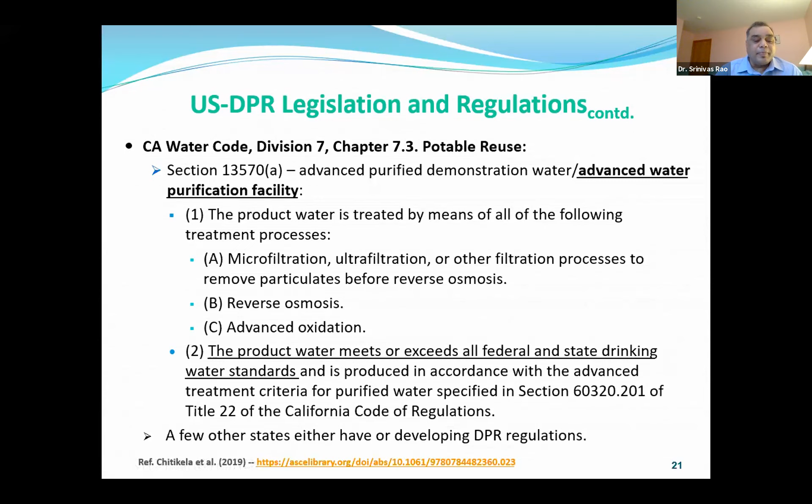So to summarize: the wastewater effluent to DPR has to be well established, and the clean effluent quality is really critical in how we apply the advanced water treatment system. And we have to observe the federal and state water quality standards, the applicability, to completion.

And the energy requirements and costs are significant for the advanced water treatment systems. And the DPR permitting of the advanced water treatment systems would be required. And as we all heard, the operation of the municipal water infrastructure in the circular economy is necessary.

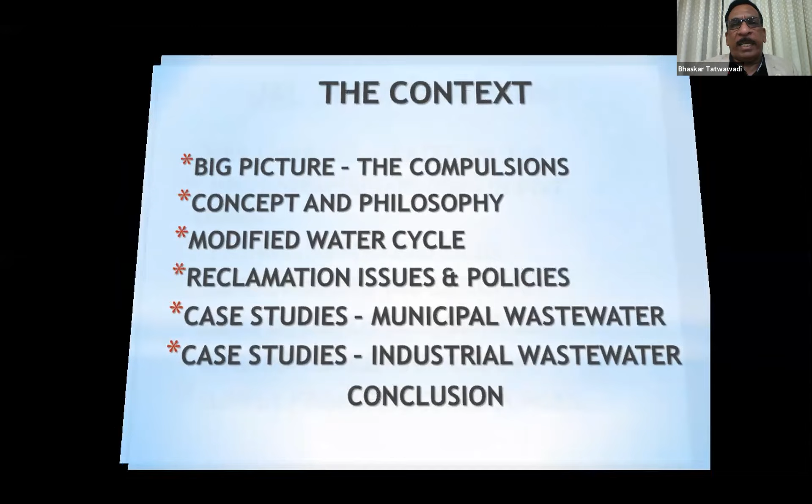Now, every water and wastewater project is conceptualized and takes birth in a context, and here I want to first discuss the context. What is the big picture in India? What are our compulsions to go for water reclamation? Based on these compulsions, how have we developed our concepts and philosophy for reclamation of water?

I have my own idea of a modified water cycle. When we talk about reclamation, there are several issues related to all the stakeholders, and policies which are generated out of these issues. Once I have discussed this, I would like to discuss a few case studies of municipal wastewater reclamation and a few case studies of industrial wastewater reclamation.

Now, talking about the concept, there is this mission mode program of the government of India, the Jal Jeevan Mission. The program is Har Ghar Jal, water on tap for every household in the country. This mission is being implemented by the government of India at a cost of 3.5 lakh crores.

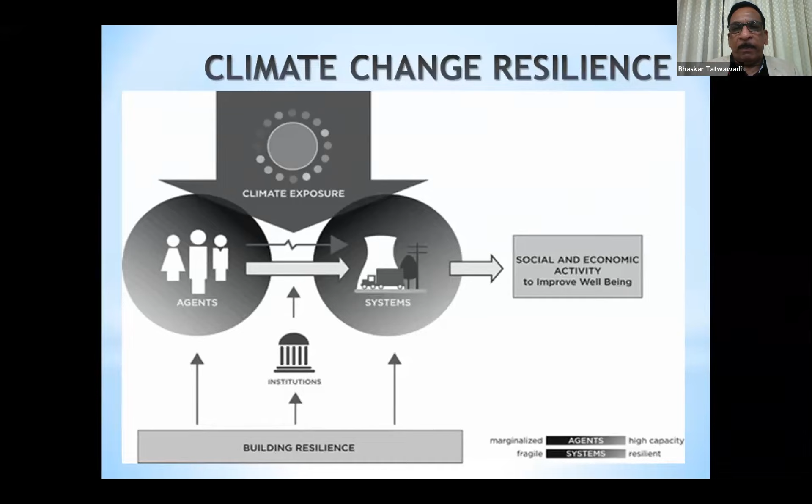A very important issue is that during the last 70 years, the per capita water availability in the country—I know Dr. Berrin also touched on this aspect—has reduced from over 5,000 kiloliters per person per year to less than 1,300 kiloliters per person per year as we are talking. This is the second major issue of my context.

Coming to the third issue, as of last year, the urban areas where it was mapped were generating about 62,000 million liters per day of sewage. The treatment capacity, being augmented all over the country, is now capable of treating about 24,000 million liters of sewage per day, leaving a deficit of about 38 to 39,000 million liters every day.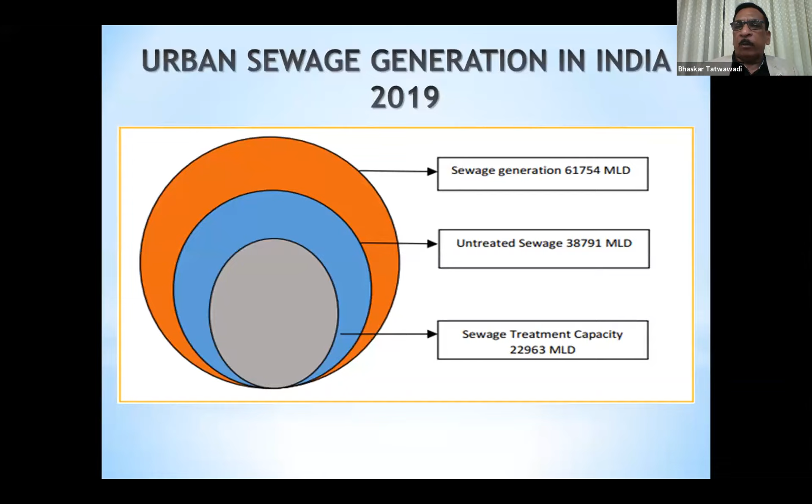This untreated sewage mostly finds its way into the rivers and other water bodies or groundwater, which are the sources of water supply to all the communities and which are going to supply water to all those 172 million households which I talked about.

My context is also that the National Green Tribunal of India in 2019 upgraded and updated the discharge standards for treated effluents across the country, without any regard to whether it is a metro city, a non-metro city, a village, a town, or a small community. These are uniform discharge standards. Now, there may be differences of opinion about the implementation strategies, but uniformity of standards is something which I personally welcome.

There is no denying that because the standards have been revised, they have given a big boost to the recycle, reuse, and reclamation industry. If we agree in principle that wastewater has to be treated and a cost has to be incurred on its treatment, then my argument is that with a marginal increase in this treatment cost, this wastewater can be rendered to a level which can be reused. We may not use it for drinking or certain other purposes, but surely we can find several uses for this treated wastewater. Therefore, reclamation of water is the only alternative for treatment and to overcome the water shortage.

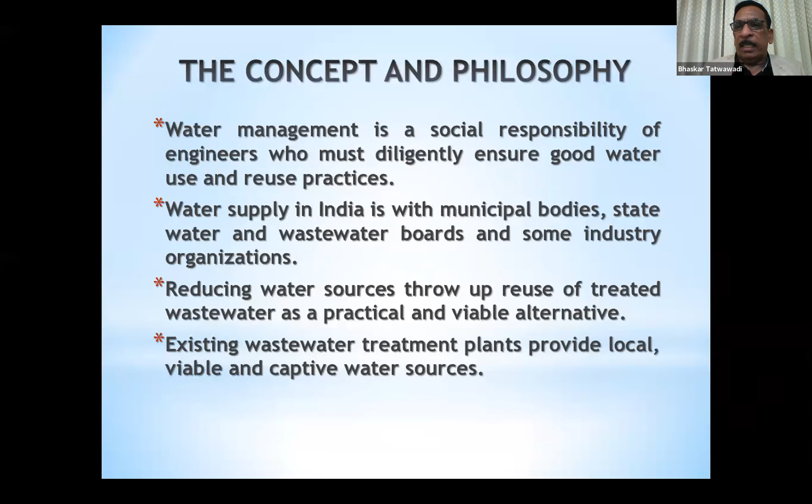Traditionally, Indian water supply is managed by municipal bodies, state water and wastewater boards, and a few industry organizations which control water sources. They harvest water, treat it, supply it, and manage the wastewater. Now, reducing quality and quantity of water in traditional sources throws up the reuse of treated wastewater as the only practical and viable alternative. Therefore, I would consider wastewater treatment plants as the captive water sources of the utilities to which they belong.

So then I come to my modified water cycle. The consequences of pollution by wastewater and degradation of water sources is clearly the challenge of every country and community. The natural purification process in rivers, ponds, lakes and other water bodies receiving contaminated water is failing as the pollution load steadily increases, so these bodies suffer from inadequacy and become stressed. Stream sanitation, a natural process eulogized by Velz in his book on stream sanitation, has completely failed in today's world due to the pollution load.

Therefore, we should draw the water reclamation cycle as a closed loop. This will also help the circular economy of water resources. So I take some water from the source, use it, it becomes wastewater, I take it to the wastewater treatment plant, treat it to a level that I can reclaim it, and this reclaimed water then goes into my water use stream, and I need to draw only the makeup water from my source. This is my concept of the modified water cycle, if I may say so.

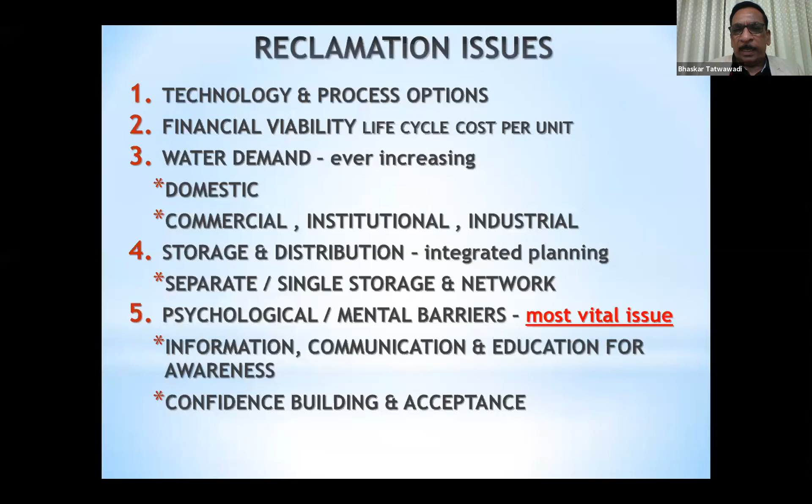I was talking about the imperative for reclamation and reuse. Now, since water is a matter of state policy, state governments in India have got treated wastewater reuse policies. The first state to bring out the policy was Rajasthan, in 2016. The policy laid down guidelines for achieving 100% sanitation, named wastewater as a resource, and stated that reclaimed water will be used for agriculture and industries with due safeguards. My own state, Maharashtra, was the second state for treated wastewater reuse. They stated that power plants and industrial establishments in the state will start using treated wastewater within a period of 3 years, and a time-bound schedule was laid down for this.

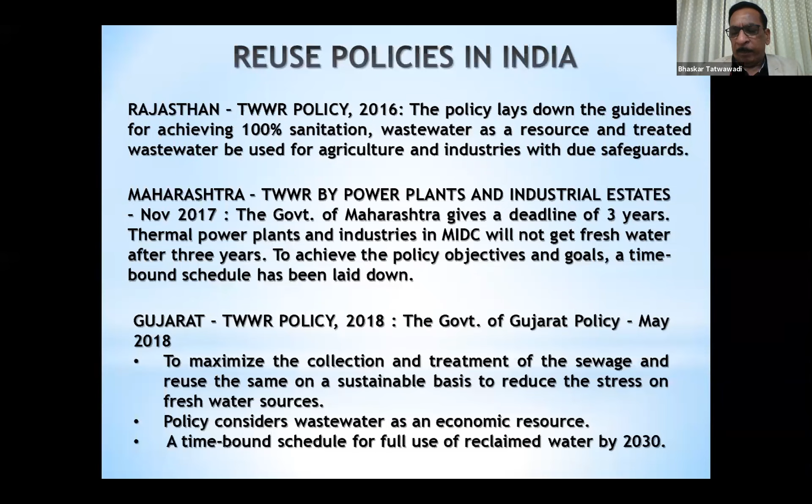Another progressive state, Gujarat, brought out a policy in 2018. Under the policy, they hope to maximize the collection and treatment of sewage and other effluents to use them on a sustainable basis, with a time-bound schedule laid down for full use of reclaimed water by 2030. Similar policies are likely to be brought in by other states, and perhaps even the central government will come out with reclamation and reuse policies for treated wastewater very soon.

I now come to a few case studies of reclamation and reuse. I have been associated with some of these in my capacity as a designer. The first one, which I love to talk about, is the case study of RCF Trombay. This is a wastewater treatment plant based on raw domestic sewage generated in the Mumbai metropolitan area. This raw sewage is picked up from one of their pumping stations, and the treated product water of about 32 mld is generated, created, and used by the factory Rashtriya Chemicals and Fertilizers.

A total of 45 to 46 mld is treated in two streams. The first stream was generated in the early 90s, and it has primary, secondary, tertiary treatment, followed by pre-treatment and reverse osmosis. The second stream, which I had designed, has only primary treatment, submerged MBR, ultrafiltration-based treatment, and reverse osmosis. We are able to get excellent quality product water, which is used for the processes in the RCF plant.

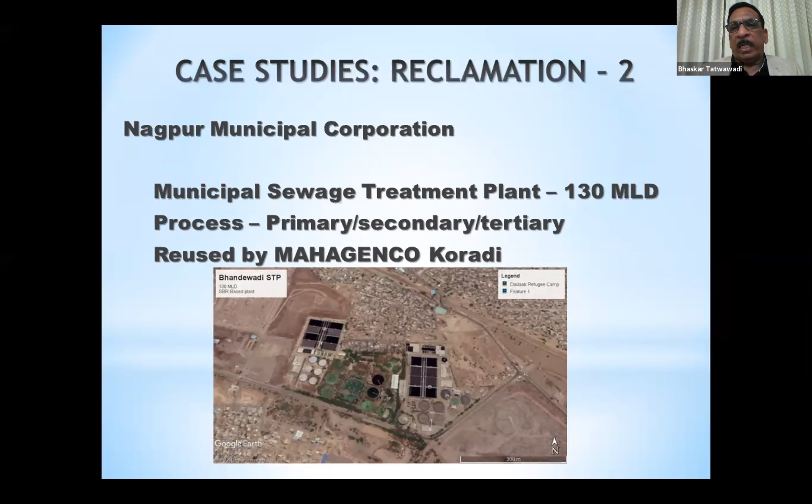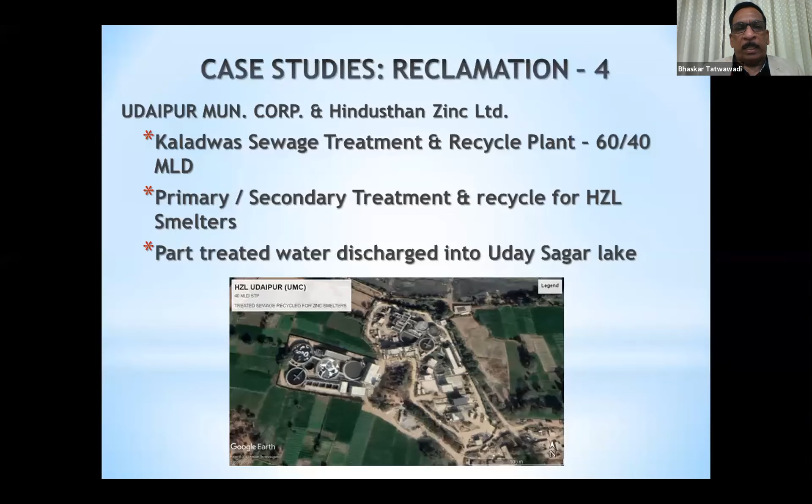Udaipur Municipal Corporation and Hindustan Zinc Limited treat about 60 MLD of sewage and convert it into 40 MLD of product water after primary and secondary treatment, and use it. Some water is also discharged into a downstream lake.

Chennai Metro Water has a sewage reclamation plant of 45 MLD product water capacity with tertiary treatment and reverse osmosis, and this product water is supplied to industries within a 25-kilometer radius. This project was initiated by the State Industries Promotion Corporation in 2009, and I had prepared the detailed project report for it. It was subsequently shelved, but was again made live and was commissioned last year, and 45 MLD of product water is now being supplied.

The next case study, which is under detailed planning and execution, is of Navi Mumbai Municipal Corporation, where two 20 MLD sewage treatment plants are being constructed for tertiary treatment, and this water will be supplied to the industrial estates within and around the corporation limits.

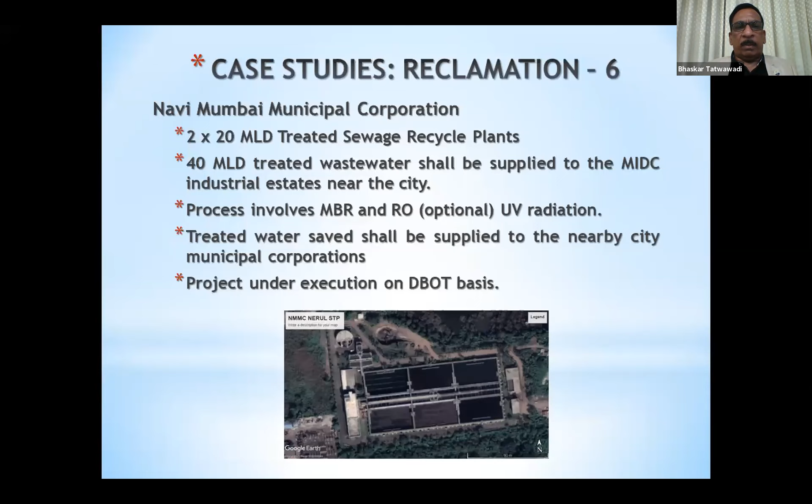Another case study is a greenfield project for a counter magnet city for Bangalore. A layout known as Nada Prabhu Kempegowda layout is being developed by the Bangalore Development Authority. Its water requirement every day is 150 million liters, and out of this, about 108 million liters of sewage generated will be recycled, reclaimed, and used for several purposes within the city.

There are a total of 9 sewage treatment plants planned for primary, secondary, and tertiary treatment, with capacity ranging from 500,000 liters to 12.5 million liters per day. The recycle network for local reuse is also part of this project, and it is under implementation.

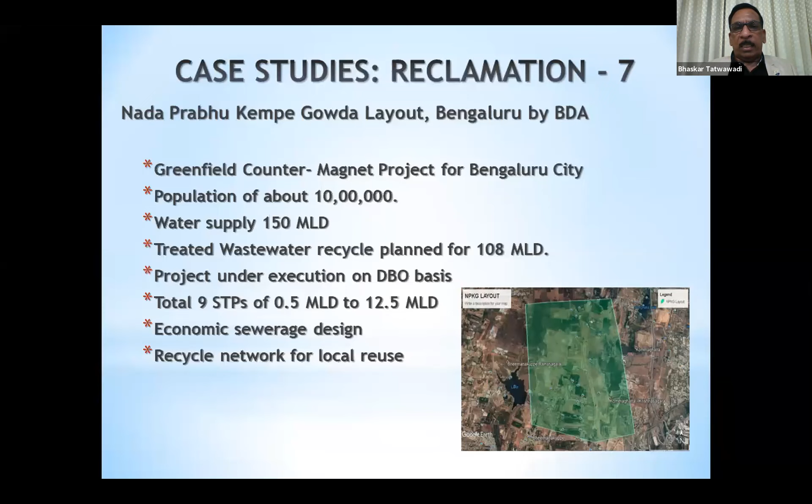And yes, never to forget, the Singapore Changi 2 design-build-own-operate project. This is a new water project with 228 million liters per day output, adopting advanced sewage regeneration technology using the double membrane treatment process of ultrafiltration and RO, followed by UV disinfection to convert sewage into potable water. This was commissioned in 2016.

Here I come to the end of the municipal wastewater reclamation case studies.

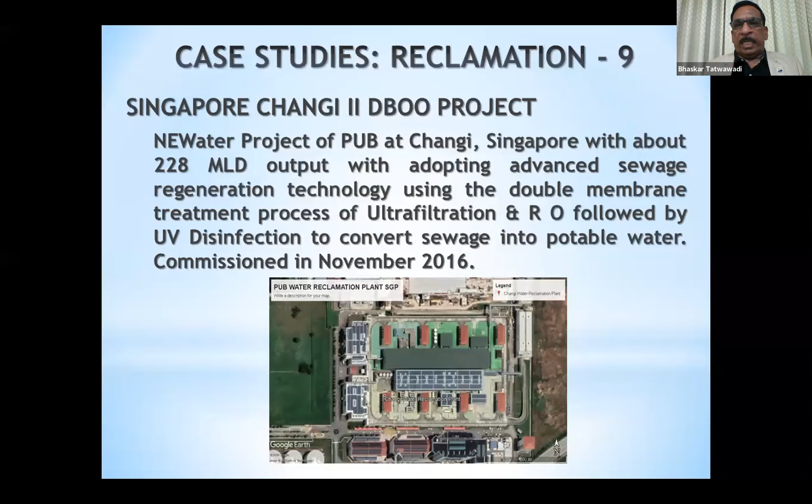The preferred process for this is equalization, anoxic denitrification, aerobic nitrification, membrane bioreactor, UV radiation for disinfection, reverse osmosis, storage, and chlorination for distribution.

I have listed some of the industrial wastewater reclamation case studies. These numbers are for Abhishek Industries, Barnala, where 5 MLD of treated effluent from textile processing and dyeing industries is reclaimed and reused.

Welspun Group Anjar reuses 5 million liters per day. Alok Industries Vapi reuses 10 million liters per day. There are other plants, one at Hassan and one at Ranjangaon, which use 5 and 6 MLD respectively.

Mahindra and Mahindra Nashik is an automotive manufacturing wastewater treatment plant of 1.5 MLD. After primary, secondary, and tertiary treatment, this entire wastewater is used for non-potable purposes.

Trident Group Budhni uses 10 million liters of treated effluent from dyeing and processing industries. And another big plant coming up for dyeing and textile processing is a 110 MLD plant, which is under construction and will be completed in another couple of years.

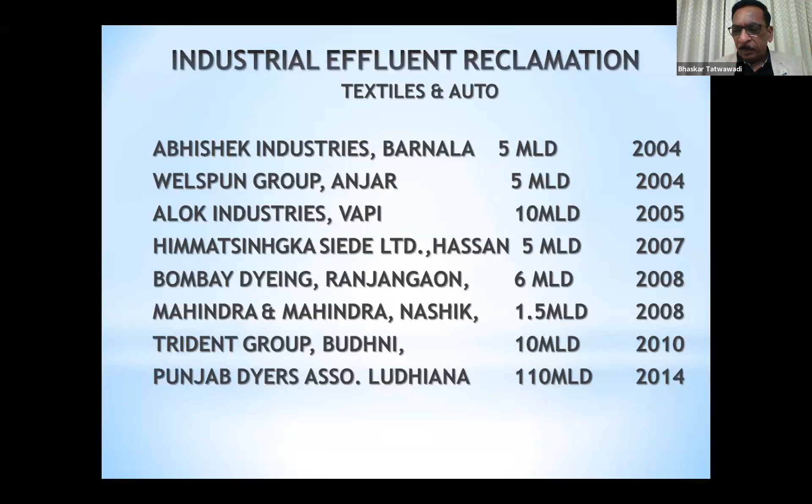So across the length and breadth of the country, I have been lucky to be associated with so many reclamation initiatives, and the experience I have gained from these has given me the confidence to believe that reclamation can be the only answer to the problems of water shortages and water scarcities.

My colleague Dr. Pradeep brought out a very pertinent issue, that of local reuse and decentralization—that communities at the community level, towns at the town level, and small district metering areas should come up with their own treatment plants, so that the problems of huge transmission networks and the associated costs can be reduced.

Now, coming to the end of my presentation. During the last few decades, the concept of treated wastewater reuse and water reclamation has gained traction. As we know, all our traditional water sources are either drying up or in very bad shape, and they are not able to provide the same quantity of water they were designed for. The answers lie in reclamation and reuse.

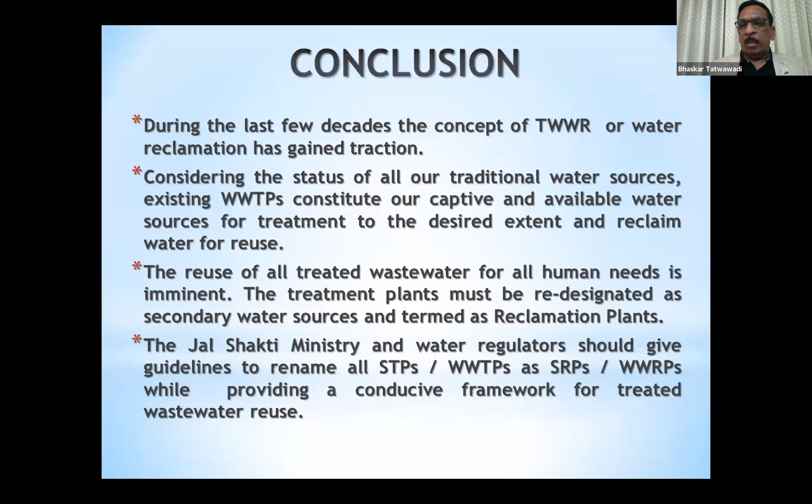I like to write on the work that I do, and I would like to share some of my articles which I have published during this lockdown, because this lockdown provided me an opportunity to ruminate over the work being done by so many water professionals around the world. I'm very happy to share these links with the presenters and attendees, and I'm sure I will welcome their reflections on what I have written.